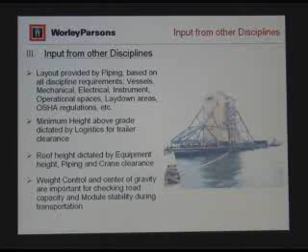Well, of course, we all work together in the design phase. All the disciplines are working together to put it together, and everybody has constraints in their own discipline. They need certain things, and all this effort is done. That's why normally we have conceptual, then preliminary design, we call it define phase, and then we have execute. So, as you said, it does not happen all of a sudden. Nobody makes the decision alone. It's all a group decision.

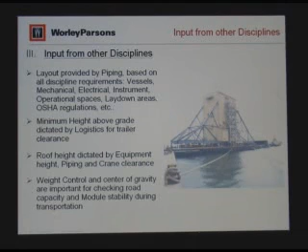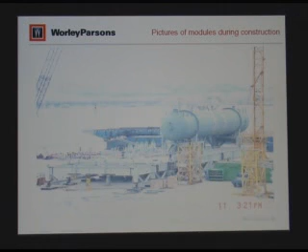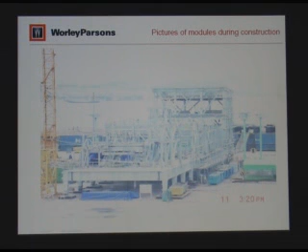Now, in this case, they decided to put the equipment before the superstructure is on. So sometimes they put the equipment first, and then they start building the columns. So you can see the different components until it reaches the stage. This is another picture also. Here they started putting the architectural. We don't have an architect here, but I will briefly talk about architecture.

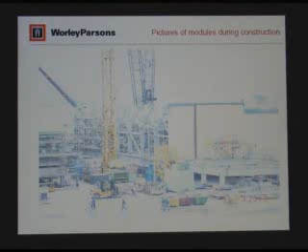Those are the siding for one wall already. They put it in place. So this is maybe 3/4 complete, because in this module lots of equipment is already there. Maybe not final setting, but they are in their position; maybe they tighten the bolts at the last minute, but they are there. Because the access is very important. You cannot always access later on.

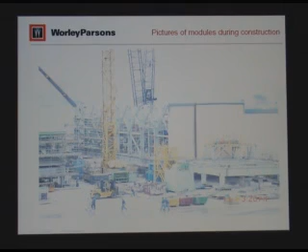Now, these are the modules that we are designing for GPP. This is one module, the 602, the utility module. This is about a 3,000 ton module. Okay, what are the components of the sea-lift module? We have the substructure, that's a rigid base for supporting the equipment. We'll talk more about it later.

In structural language, you call this base the substructure. This is the base. That's the substructure. And then we have a superstructure, which is everything above the base. It consists of columns, like these columns. Roof, of course, you have a roof here. A cooler platform, that's a platform that is normally independent of the roof. And then we have intermediate platforms. For instance, here, there is an intermediate platform inside the module.

And then we have integrated pipe racks, because inside the module, part of the module here between these two columns is a pipe rack. And normally, when we have several modules next to each other, this pipe rack continues, and later on it will merge with the main pipe rack, which is outside. Normally the main pipe rack is exposed in North Slope construction. It's outside. But this is all integrated into a module.

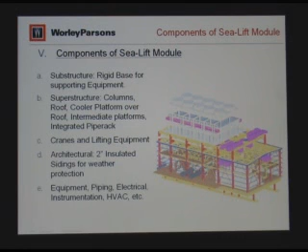And then we have cranes and lifting equipment, and we have architectural 2-inch insulated siding for weather protection. And then we have equipment, piping, electrical, instrumentation, all this. Now, definitely the cost of this is maybe 80% or 85% of the rest. We put it in one item here, but it does not really reflect the importance. This is very important, the equipment and all this. But here we are emphasizing structure.

Okay, so here I will explain a little bit each component, the rigid base component. Typically we use 5 feet girders, about that high, and these girders many times include electrical openings. Whoever is involved in electrical GPP design will see that we use the base because it's high, and it does not really hinder the structural function. We can use it for structure, and also to locate all those cables and cable trays. And we use it also for drainage pipes. Drainage is within this 5 feet.

On that project, Sakhalin, for instance, we did 4 feet. 4 feet structurally was good enough, but then we regretted it, because with 4 feet we could not locate the electrical cables and drainage. 5 feet is not really much more expensive than 4 feet, but it has a much better function.

Do lifting lugs go into the base? There are no lifting lugs here. We do not lift this. This is all transported by RTV. You see? Okay. Now, locally, sometimes they can prefabricate a piece of base, and then lift it and assemble it with the rest. But that will be kind of temporary lifting. So how do you select the RTV? Under that, you just, like, the column there?

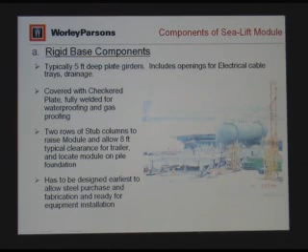But you have to know, you have to balance it. Remember when we said determination of center of gravity, this is very important, because the RTV is all hydraulic. We will explain a little bit more. Hydraulically connected, so it cannot take unbalance. You have to know exactly where the center of your module is and adjust the RTV to that exact center. The center of the RTV and the center of the module have to match, and then at that time you can raise it. And if it doesn't match, then automatically it will tilt, and then Mike will know and move it,

and he will explain that in his presentation more than this. But here, suffice to say, this is how we transport it, and that's why we provide the tool, the means for logistics to be able to do that. And this is determined by logistics, as I mentioned earlier. 8 feet is what is convenient for logistics. We could do it 5, 6 for us. It doesn't make much difference really.

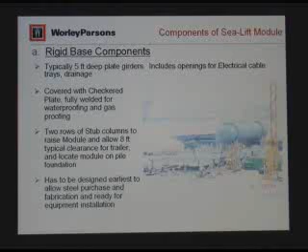Now, another feature of the base is that it has to be designed early, because normally the project wants this base to be there very early so that they can start putting equipment on it. And if the base is late, then the whole project will be late. That's why most of the time the base is designed fast, even with preliminary values from equipment, and with our experience, we make it a little bit on the safe side, and just issue for construction, and then later on we adjust it for minor loading between the plate girders. But the plate girders are very important to be purchased and fabricated and ready for equipment installation. Any question?

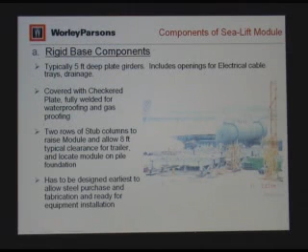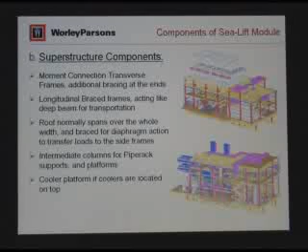Okay, now superstructure components. The superstructure components consist of moment connection transverse frames. From here to here is basically one frame, and these are the side frames. And then we have longitudinal braced frames, from here to here longitudinal, and those are braced. Not like the transverse frames that are moment connected, because we cannot put any bracing in the transverse direction. Most of the time, piping and equipment want to put their stuff, so they ask us to give them clearance. It's like this room. If you start putting columns and braces here, you cannot put people.

Same longitudinal. Now the roof normally spans over the whole width, from here to here. And it's braced here to create a diaphragm action, such that when we have wind or seismic or acceleration due to barge, some of these loads are transferred to the side frames that are braced. Because the moment connection frame cannot take too much really. It can take, but it will deflect a lot in order to take it. But these, because of the bracing, restrict the deflection.

That's why structural people like to put bracing, because you restrict the deflection. It's not necessarily the strength. The strength you can take, but imagine a frame that moves 2 feet. It's not going to fall, but it's too much, and therefore you like to have braces to limit it to a few inches, 1 or 2 inches, something like that.

That's the order of magnitude. And then we have intermediate columns for pipe rack support. For instance, because we have here between these two pipe racks, we try to put as many intermediate columns as possible if we are allowed.

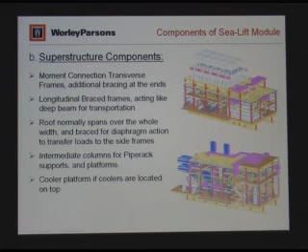And HVAC is very important for aeration in modules because of the aeration purpose of the process, but we do provide supports for this HVAC, and some of this support is here. Cooler platform for top. And next, the other components of the module are cranes and monorails.

Those are important items. For instance, you see this module, we have a span from here to here, but in some cases we were able to brace part of the frame. And those cranes, if you have heavy equipment here, a compressor or equipment that needs maintenance, then the cranes will be handy because you can remove, maybe not the whole piece, but items like the rotor and some parts of the equipment, which are already pretty heavy. They would be between 10 to 20 tons capacity.

So we need it. And also, if we have pumps and valves, then monorails are provided. Monorails are simple beams with a hoist; mechanical people, if there is anybody here, would know. But monorails basically are simple to design, and we just put them and support them with transverse beams.

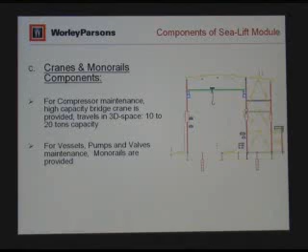Okay, now architectural components. Architects are mostly in petrochemical, very rarely used in refineries, except for control rooms maybe. But for modules, they are an important contribution, because they have to cover the modules. Typically, 2-inch insulated panels are provided for weather protection. So we use the same panel for the siding, for the roof, and for the soffit. Even the soffit below has to be covered with insulation. So it's like a closed box.

Now, there is one phenomenon that process people would know about: if you have steel partially exposed, like this one, this steel is inside the module and outside, then there is a condensation phenomenon that happens here, because it's cold, part of this cold goes inside, and it condenses the humidity in the air. So we want to avoid this. Therefore, we would put the same siding for a certain length of maybe 2 to 3 feet on this.

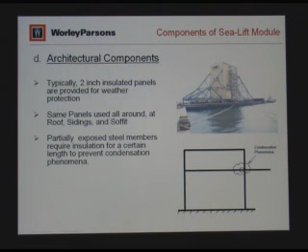And that's a detail that is important for the architect, because they don't always have the space to put all these sidings around this. So we have to work with them. That's part of the design, really, to make the design constructible and at the same time possible for other disciplines, because the module is very congested. We cannot just put steel everywhere. We have to leave space for all the other equipment, even including siding.

And finally, we have the equipment, which is a major part. As I said, that's probably 80% of the cost. That's why we have a module in the first place, to locate equipment and make this equipment function and do the work for the purpose. Equipment includes turbines, compressors, generators, waste heat recovery units, stacks. For instance, here we have 2 stacks, vertical and horizontal vessels.

This is a vertical vessel here. This is a horizontal vessel, even though you don't see it very well, I'm sorry. These are exchangers here. Coolers, as you see, electrical, instrumentation, and mostly piping. Piping is all over the place, connecting all this equipment.

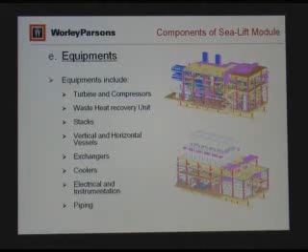And then module fabrication and transportation. Very briefly, I'll say something about this. For module fabrication and transportation, we will cover steel material, fabrication, assembly, land transportation, sea transportation, and foundation setting.

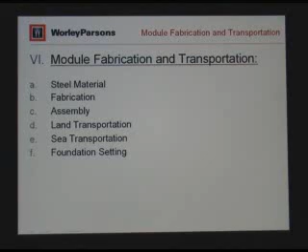So steel material: for the North Slope, because of the harsh weather, we have to have a steel material that's not the same as we use here in California. It has to be ductile, not brittle, more so than other places. In seismic areas you always need ductile steel, but this is for a different purpose; there is no seismicity, by the way, in the North Slope. It's a very low seismic area.

So it's not a problem from the seismic point of view, but it's a problem from the cold weather point of view. The chemical composition of the steel is very important for cold weather. And they test it with a test called the Charpy test, which determines the degree of ductility at low temperature, from -30 or minus 50. Minus 50 is the most stringent.

Exposed steel requires more stringent testing than covered steel, of course. Once this steel is covered, it's not as brittle, or it's not exposed to this phenomenon as much. Thicker members are more prone to cracking than thinner members. Even so, I have seen even a 1/4 inch plate, checker plate, crack.

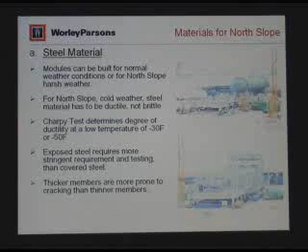It reached the North Slope, and all of a sudden the plate cracked from the beginning to the end in several places. And the reason was the chemical composition: at that time they didn't find what we were specifying. They replaced it with Japanese steel that does not have the same chemical composition as the steel that we specified. And sure enough, it cracked, and the fabricator was responsible, because he took responsibility for exchanging the steel.

Now, fabrication. Structural members are often fabricated in a separate shop and transported to the assembly site. Sometimes you have a shop that can fabricate and assemble at the same location, like Hyundai in Korea. They have a huge space, and they fabricate and assemble at the same location. But most of the time in the United States, it doesn't happen like this. Sometimes we fabricate in Sioux City and we assemble in Louisiana, for instance.

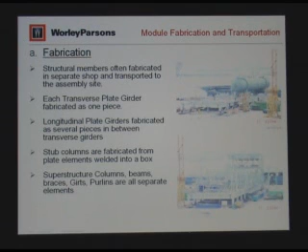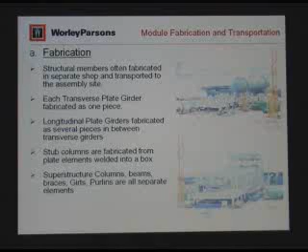So we fabricate in these separate shops each transverse plate girder separately like this, and the stub columns are fabricated from plate elements. Maybe this is more interesting for structural people than for other disciplines, but I just mention here that it comes fabricated into elements. Most important is that this piece is one piece. Then the longitudinals are several pieces, and of course the columns are separate.

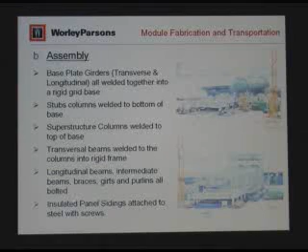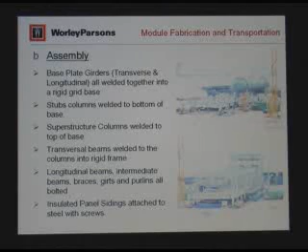And then we go to the assembly. In the assembly, all the plate girders, transverse and longitudinal, are fully welded together into a very rigid base. The stub columns are also welded to the bottom of the base, and the superstructure columns are welded to the top of the base. The transverse beam, which goes from column to column like this, is also welded to the columns, and all the rest is normally bolted.

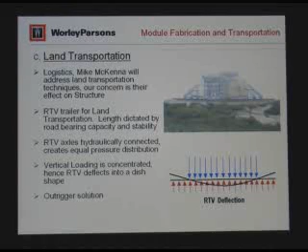But you see the cost of this steel. Now you can ask, why don't we make a module as long as the RTV? Because operations would be very costly, the air conditioning and all this. So we want to use as small a module as possible for operation, for walking around equipment, maintenance, and all this.